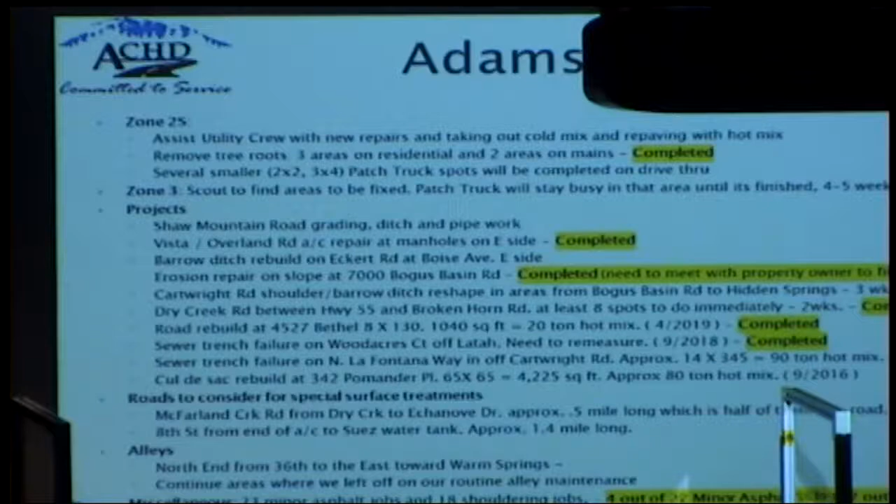But again, we're chipping away at these things, and the grade crew is keeping very busy. This next slide shows from March 18th to May 13th when we were down - these are how well they've been able to complete the work orders that backlogged during the stay-at-home order. If you were to do a calculation, we're approximately 76% of those completed, in addition to the higher priority ones that have come in since this list was created.

Adams Utility - I mentioned before some of the work they were doing in the chip seal area, but on the project side, a lot of good progress with 7 out of these 8 projects already completed this summer. The one we have open still is the drainage improvements on Shaw Mountain Road. Again, absolutely tremendous work by the Adams Utility team to complete the projects we've had on backlog.

The work orders do keep us pretty busy. Our work order backlog has increased to approximately 160 items in total. So while it looks like we're not completing the ones we had on backlog at this point, they are working toward getting those work orders completed. They're able to get approximately 10 done each month, so we're looking at those work orders and trying to determine if there's a better way to knock those out and get them completed.

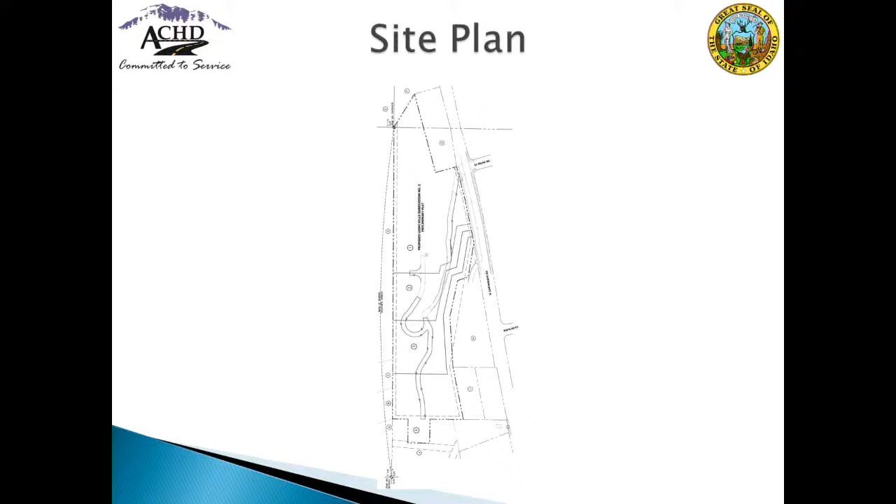The 9-acre site is located at 3773 North Cartwright Road, approximately 1,665 feet north of Bogus Basin Road.

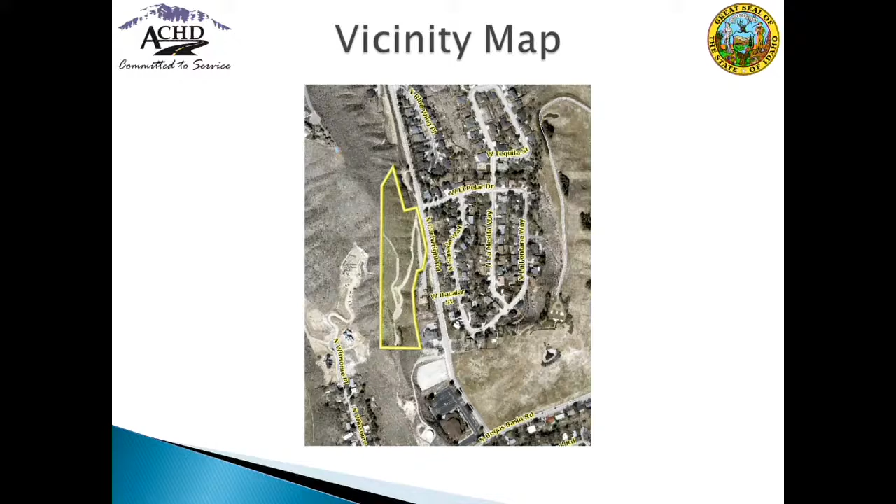The applicant has requested a waiver of ACHD's frontage improvements policy, which requires Cartwright Road to be improved abutting the site as a 40-foot wide rural collector street section with 2 12-foot wide travel lanes and 8-foot wide paved shoulders, within enough right-of-way to accommodate drainage.

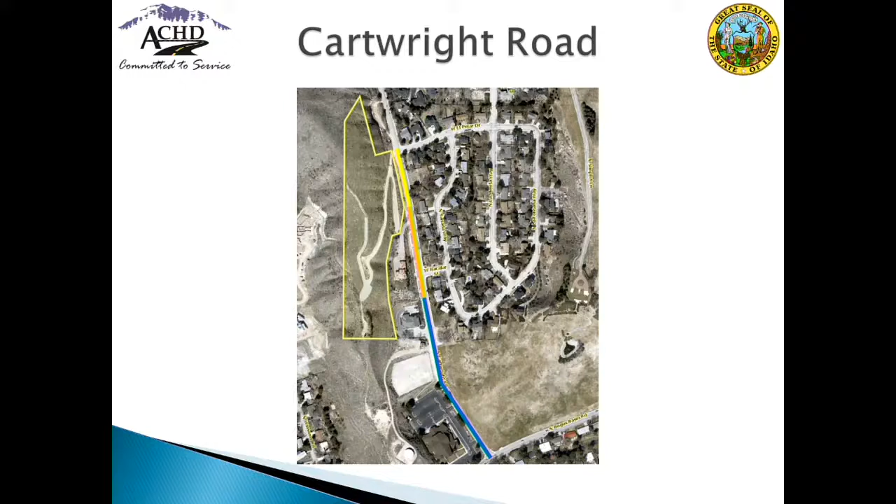Staff is not supportive of the requested waiver and has recommended alternative improvements. To provide some context, I wanted to discuss the existing conditions on Cartwright Road. Cartwright Road north of Bogus Basin, shown here in blue, is an existing 40-foot wide street section with curb, gutter, and sidewalk on the west side.

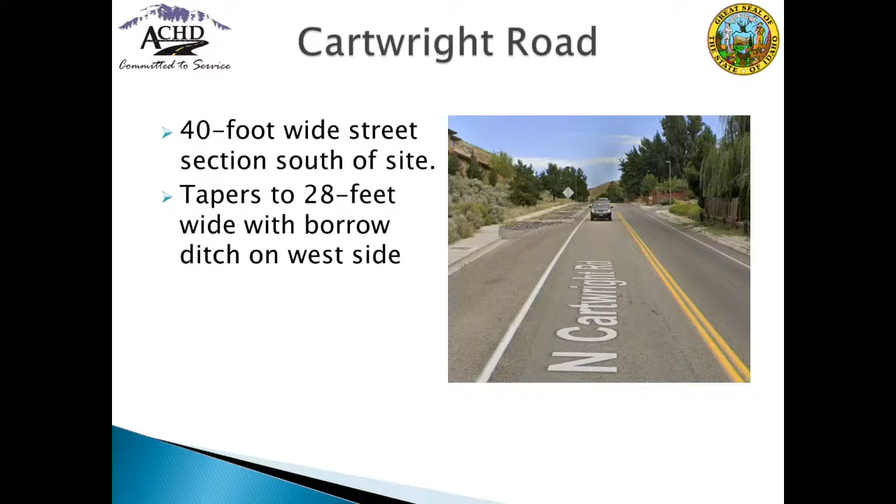Cartwright Road south of the site, shown here in orange, tapers from a 40-foot wide street section with curb, gutter, and sidewalk on both sides down to a 28-foot street section with a borrow ditch replacing the curb and gutter on the west side. Cartwright Road abutting the site, shown here in yellow, is currently improved with 2 travel lanes and 28 feet of pavement.

Vertical curb, gutter, and an attached sidewalk exist on the east side of Cartwright across from the site. A 15 to 18 foot wide borrow ditch and detached sidewalk exist on the west side of the roadway abutting the site. ACHD has installed rock check dams within the existing borrow ditch abutting the site to slow the flow of water and improve drainage in the area.

ACHD's master street map identifies Cartwright Road as a rural collector roadway, requiring that the roadway be improved as a 40-foot wide rural street section with 2 12-foot wide travel lanes and 8-foot wide paved shoulders.

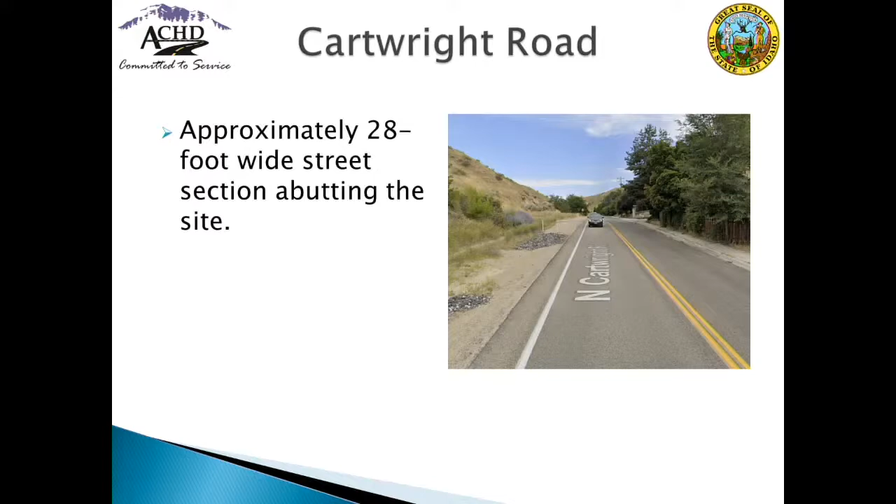Cartwright Road is listed in the Roadways to Bikeways Master Plan as a Level 2 facility. Consistent with that plan, a minimum of a shoulder bike lane should be provided on a Level 2 facility with speeds of 40 miles per hour or less and less than 15,000 vehicle trips per day. This applies to this segment of Cartwright Road, which has a speed limit of 30 miles per hour and an average daily traffic count of 1,914 vehicle trips per day.

The applicant has requested a waiver of ACHD's frontage improvements policy for Cartwright Road and has requested not to widen the pavement, believing that reducing the width of the existing borrow ditch will adversely impact the existing drainage system. Additionally, the applicant has noted that there are no existing bicycle facilities within the vicinity of the site.

Staff is not supportive of the proposed waiver of improvements and believes that the drainage can be accommodated within a smaller borrow ditch and that additional pavement width can be provided. Because of this, staff has recommended alternative improvements to allow for additional pavement abutting the site.

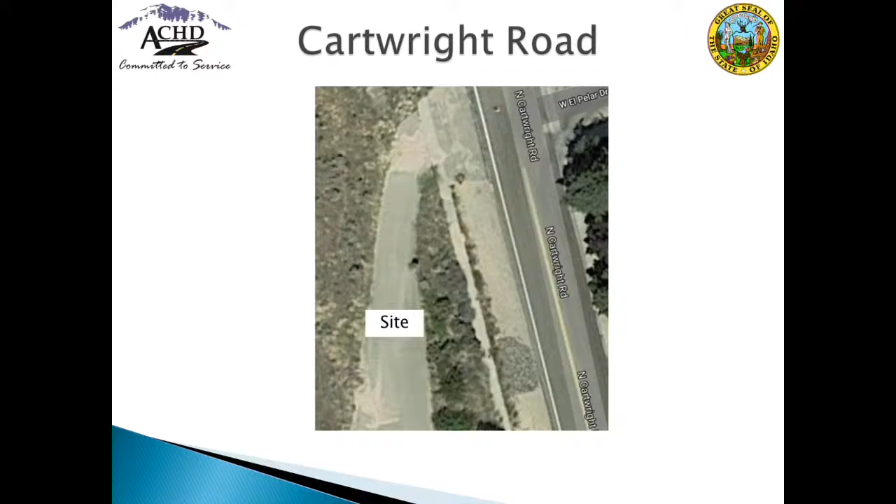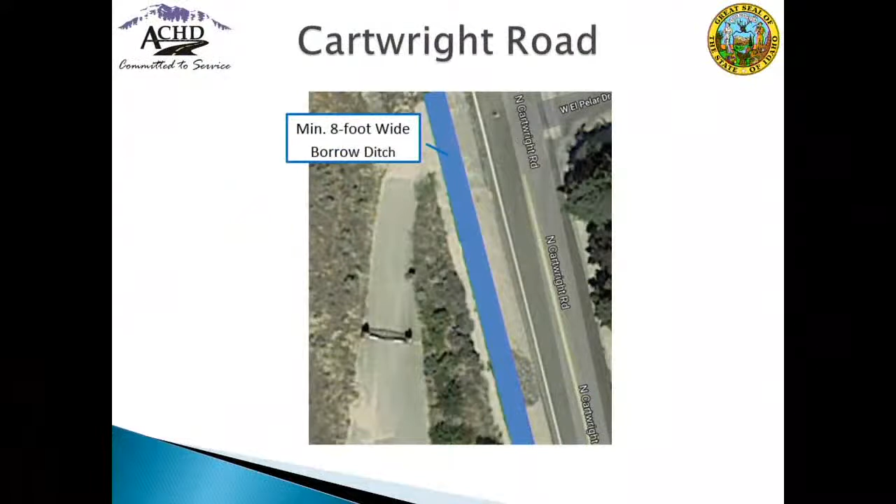Due to the existing sidewalk and borrow ditch, staff recommends a modification of policy to allow the applicant to widen the pavement on Cartwright Road abutting the site to the maximum width possible while preserving a minimum 8-foot wide borrow ditch from the existing sidewalk location. Maintaining a minimum 8-foot wide borrow ditch allows for the additional pavement width while not compromising the existing drainage system.

Pavement widening will vary from approximately 7 to 10 feet based on existing conditions. This will provide adequate pavement width to accommodate 2 vehicle travel lanes and 2 bicycle lanes.

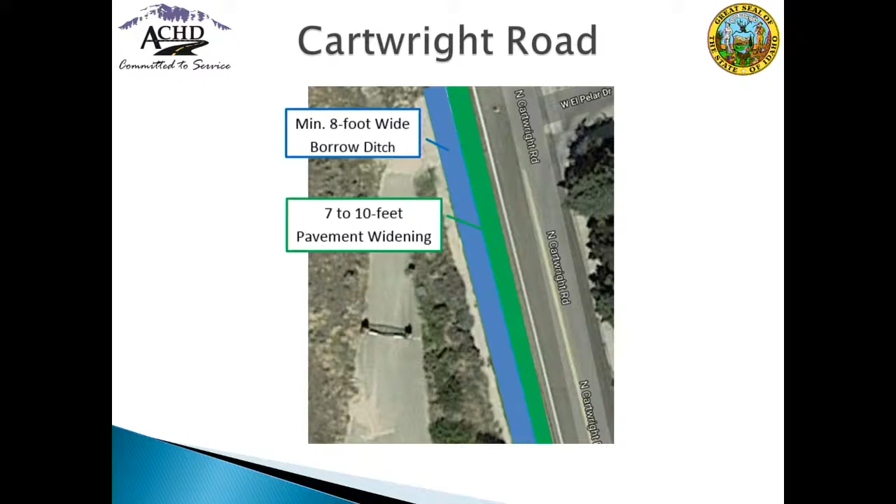If completed, this project would allow for an approximately 0.4 of a mile continuous segment of Cartwright Road north of Bogus Basin Road to be improved with a minimum of 36 feet of pavement. While bike lanes do not exist on Cartwright Road north of the site, this would allow for bike lanes to be striped on Cartwright Road adjacent to and south of the site, extending to Bogus Basin Road where they do not exist today, consistent with the Roadways to Bikeways Master Plan.

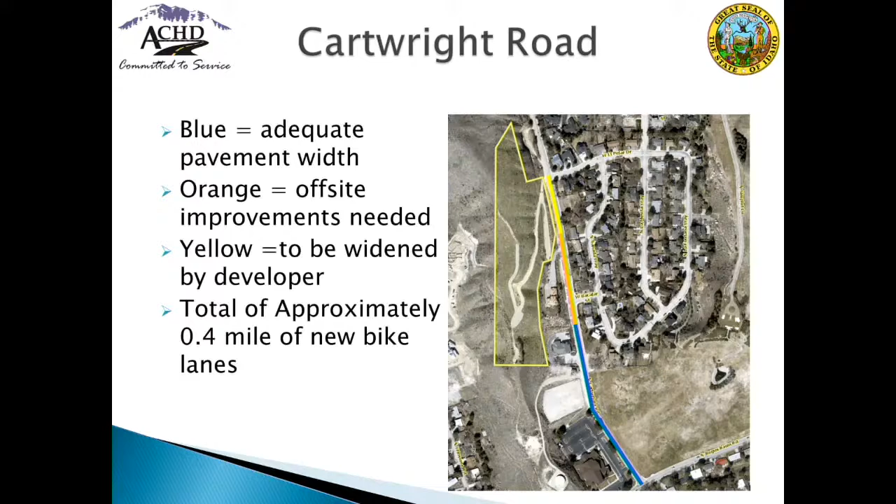If pavement widening is not required, the existing 2-foot wide paved shoulder will remain for bicyclists. Staff recommends approval of the staff report as written, and I will stand for questions.

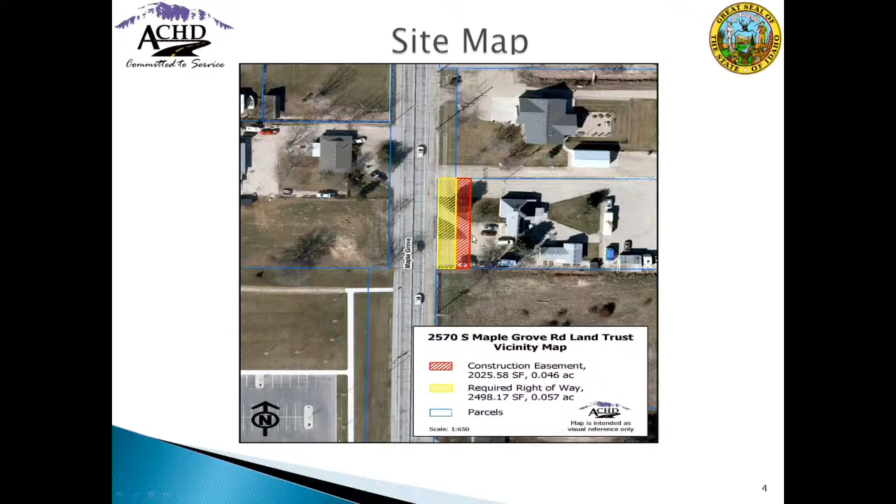The acquisition is 0.057 acres or 2,498 square feet, and the construction easement is 2,025 square feet. The highest and best use of the property is single-family residential.

A formal offer was made on November 13th, 2019 for $14,466.56. Discussions occurred with the property owner from December 11th, 2019 till May 21st, 2020. There was a period where we did not hear from the property owner, and then the property owner retained legal counsel.

Offers were eventually rejected by both parties. And as always, even after this condemnation action, there will usually be negotiations that still go back and forth. So a condemnation action is not the end of negotiations.

It is staff recommendation that the commission approve the condemnation with the following actions: declare that the acquisition area is necessary for the project as a highway and public use, authorize staff to proceed with the condemnation action, and execute an order of condemnation for the acquisition area. I will remain standing for any questions.

Madam President? All right, thank you. Commissioner Baker? Yeah, just out of curiosity, what was their counteroffer? It was approximately $36,000. And we couldn't split the difference? We actually put an offer that was pretty close to splitting the difference. Okay, thank you.

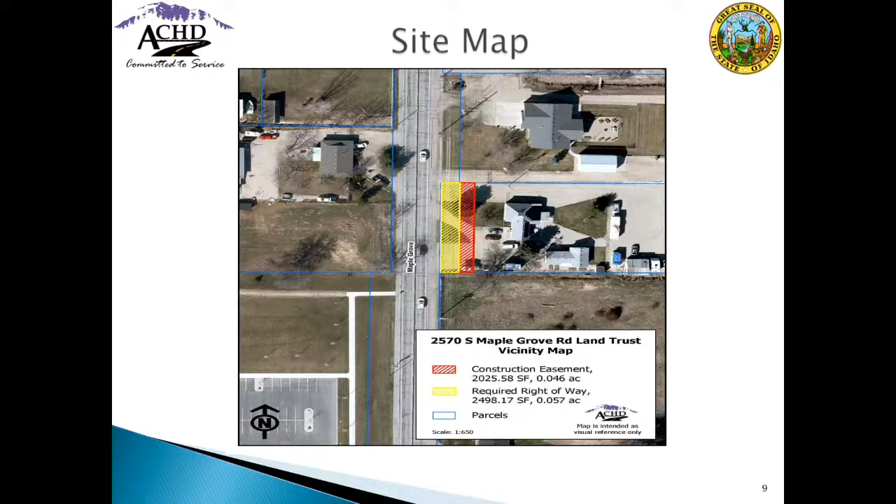Thank you. Commissioners, any other questions? All right, hearing none, thank you. We do have Mr. and Mrs. Walker that are with us that would like to speak to this decision before us, review the property owners.

Ms. Spencer, did we lose them? Yes, the Walkers, I'm looking to see if they're still on. Yes, Les and Candy, you need to unmute yourself. Yes, oh, can you hear us okay now? All right, there you are. Yes, thank you. All right, welcome, Mr. Walker.

If you'd state your name and address for our record, please. Les Walker, 2570 South Maple Grove Road, Boise, Idaho, 83709. All right, go ahead, sir.

Okay, I'm not sure, I guess I'm very new to this thing. I guess I want to refer to the gentleman that just spoke. What was his name? Mr. Surter. Yeah, Mr. Surter. The one point I heard you make, and I definitely want to zero in on that, we have no interest in going to or through a condemnation thing or a court proceeding or whatever.

Our issues at this point in time are time. We are leaving the area here shortly, and hopefully can get this thing wrapped up. So if there is room for negotiation, we are certainly looking forward to that. The second thing, of course, is money, and we'll discuss that in a moment.